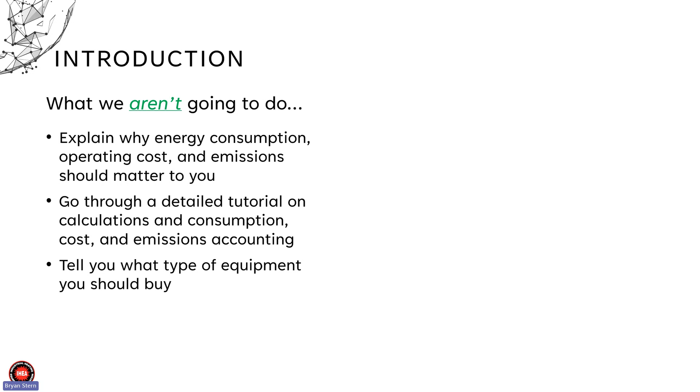And finally, we're not going to be pushing what equipment you should buy here. This is not an agenda-driven discussion. Fortunate enough, working at Gasbarre, we offer both kinds of equipment, and we saw that as a unique opportunity to be able to do a kind of unbiased review and just gain a better understanding of how these different approaches to heat treating do stack up. So we're excited to bring that to you.

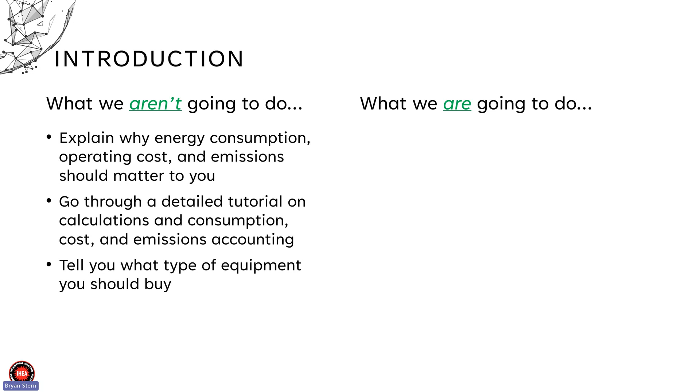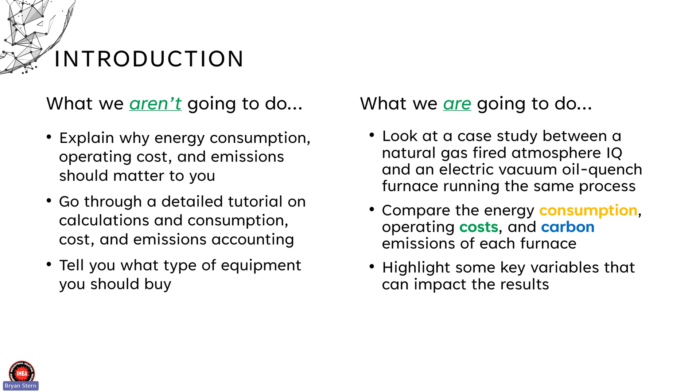We are going to cover a case study comparison between a natural gas-fired atmosphere IQ furnace and an electric vacuum oil quench furnace running the same process. We're trying to stack these furnaces up: if they're doing the same thing, how do they compare across their energy and utility consumption, the cost of operating that equipment, and the equivalent CO2 carbon emissions from running that process. After we go through those results, we'll look at key variables that can change the picture, and then summarize the key takeaways. The objective is to equip you with information to gain familiarity with things to look at when comparing and considering.

One thing outside the scope of this is other reasons you might choose between these two types of equipment. I'm biased, my background is in vacuum, and I think there are a lot of advantages to that approach, but we're not looking at process reasons you might change it. There are other reasons to decide between these technologies, whether environmental, the work environment each piece of equipment creates, safety, process flexibility, or insurability. Those are all important considerations, but we're really focused on the nuts and bolts of how these stack up from a carbon standpoint and a cost standpoint.

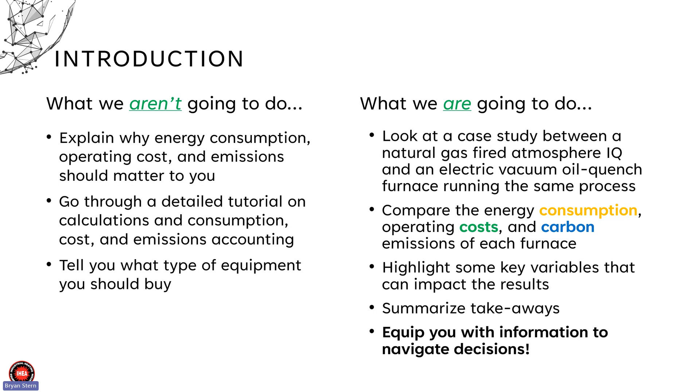To look at that, we're going to go through some background, looking at the pieces of equipment, the furnaces themselves, the workload we're running, and the process we're running it through. We'll do a brief overview of the calculation methodology, then dive into comparing results across those three C categories: consumption, cost, and carbon emissions. We'll look at the key drivers and then go over the takeaways.

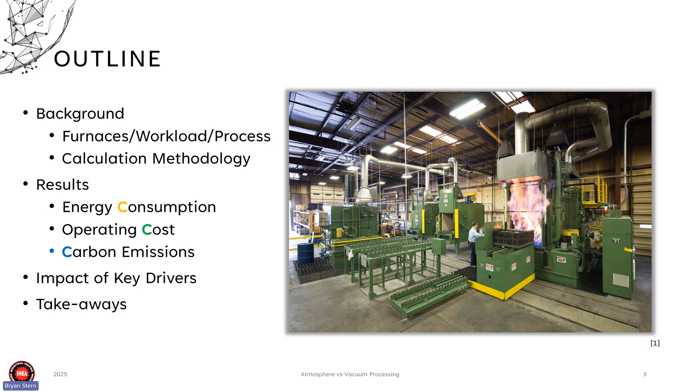Going through the background first, we'll start with the furnaces. We've got the atmosphere IQ furnace on the left here and the vacuum oil quench on the right. Each of these pieces of equipment has the same size work zone, a 36 by 48 work zone size. One of the primary differences is that the atmosphere IQ uses recuperated gas-fired burners for its heat source, where the vacuum furnace uses electric elements fired by transformers with SCR controls.

A couple other notable differences between the pieces of equipment: the IQ furnace has 12 inches of ceramic insulation, where the vacuum furnace only has 2 inches of graphite felt, which is pretty typical for vacuum construction, in an effort to maintain process environment purity as well as keep pump down time to a minimum.

In an effort to maintain that environment, the atmosphere furnace uses endothermic gas. This particular furnace was measured at 750 CFH for its process environment, where the vacuum furnace removes the atmosphere to create that protective environment. So two different methods for creating the process environment, and we'll see that both the insulation difference and the atmosphere difference are some of the key things that impact the outcome here.

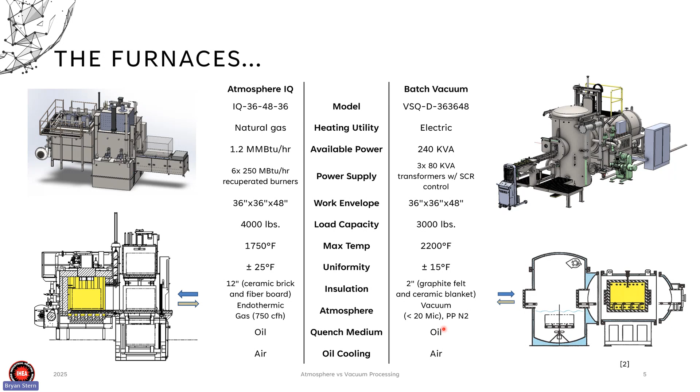There are a few other differences, things like total load capacity, but because we'll be processing the same workload in each, those kind of cancel out. Again, the objective here is an apples to apples comparison of two similar sized pieces of equipment processing the same load.

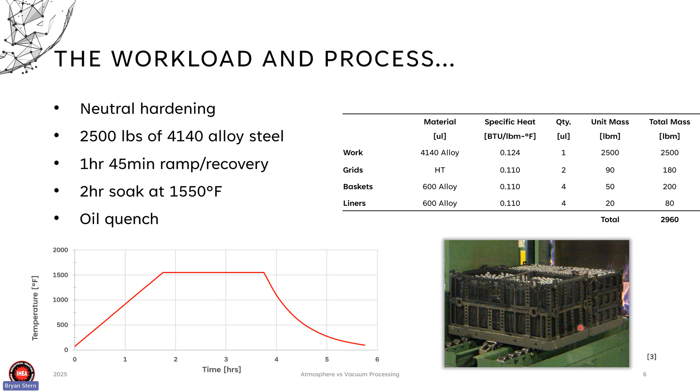Speaking of the workload and process, we'll be looking at a really basic neutral hardening process with 2,500 pounds of 4140 alloy steel, a simple ramp soak profile with about an hour and 45 minutes to ramp, corresponding to about a 15 degree per minute ramp rate, soaking for 2 hours at 1550. Accounting for each of the different components of that workload, the work itself, grids, baskets, and liners, that's a pretty typical picture of what a workload might look like going into this furnace.

We won't get into the details of the calculation, but wanted to do a brief overview. Here we have an information flow diagram outlining the process used here. We're taking information about the workload, fixturing, cycle definition, how long we're holding it, temperatures, etc., and combining that with measured and calculated operating and performance data for the furnace, feeding all of that into a model to come up with energy and utility consumption.

When we have that consumption value, we can combine it with prices for those utilities to come up with operating costs per cycle or on an annual basis. We can combine that same energy and utility consumption with emissions factors to come up with carbon emissions. So you can see that energy consumption will drive and is related to the operating costs and carbon emissions, which we will see.

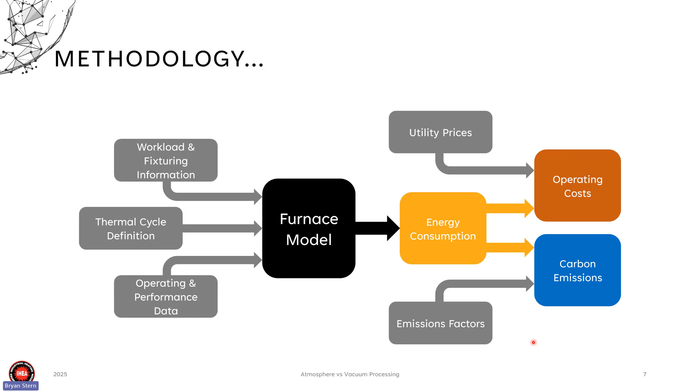I know we might be coming from various backgrounds of exposure to the emissions conversation and things like emission scopes. So I wanted to take a minute to go through some basic terminology and an overview of that. There's a fairly common misconception that if you remove on-site combustion and move to electrification, you eliminate carbon emissions.

That might be true if you're specifically contracting for renewable sources of energy. But in general, for carbon accounting, you're required to account for all sources of emission associated with that process. That includes things like on-site combustion, the CO2 generated there, which falls under scope 1. It also includes emissions associated with any electrical or energy generation used to generate the power used in your process, which falls under scope 2. And it covers any emissions associated with transportation of product, use of product, downstream.

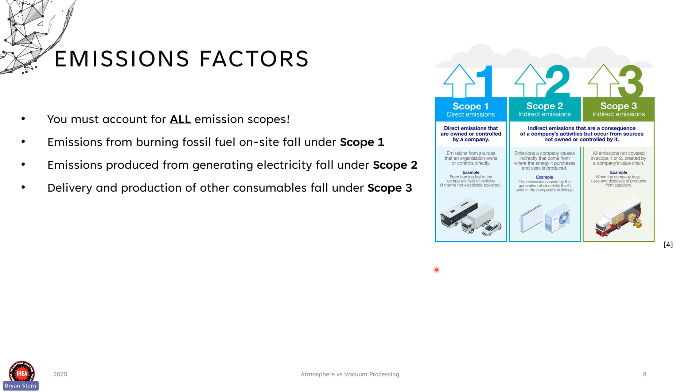In our case, often with thermal processing equipment, we're looking at things like process gas generation, production, delivery, and similar factors. The good news is it's fairly simple to account for the emissions associated with those things, because in most cases, emissions factors allow for direct conversion from amounts of energy consumed to equivalent CO2 emissions. Those emissions factors are publicized and made available at a regional and national level, so you can look up those values published by the EIA and the EPA.

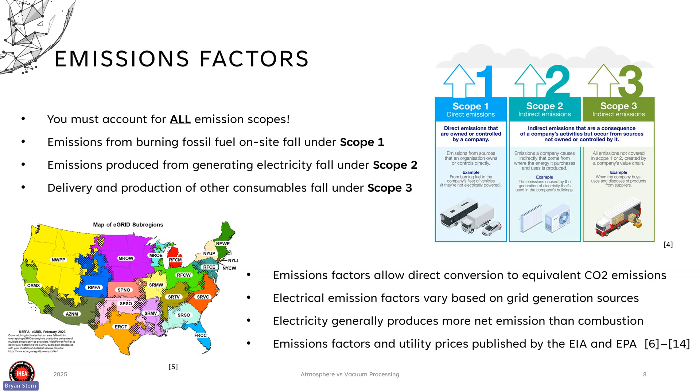A really important thing to note here is that this will show up as we're looking at electrical costs. In general, when we're looking at electrical heating and electrical generation, there are many more processes associated with that than on-site combustion. You're taking some chemical fuel source and converting that into thermal energy, then mechanical energy, using that in generators to generate electricity, then transmitting that electricity, bringing it back, and converting it back into thermal energy. Whereas for on-site combustion heating, you're going directly from chemical to thermal, only dealing with the efficiency of conversion for that one process, so it tends to be very efficient.

Just to illustrate that, in this case study we're using recuperative burners for that process at about 1550. If you look at the efficiency associated with that burner, we're looking at something a little over 75% efficiency. If you look at typical efficiencies for electrical generation associated with different types of power plants, you can see pretty quickly that typical efficiencies in a burner are more efficient than your most efficient power plant. So unless you're using renewables, it's not necessarily a better option even for emissions.

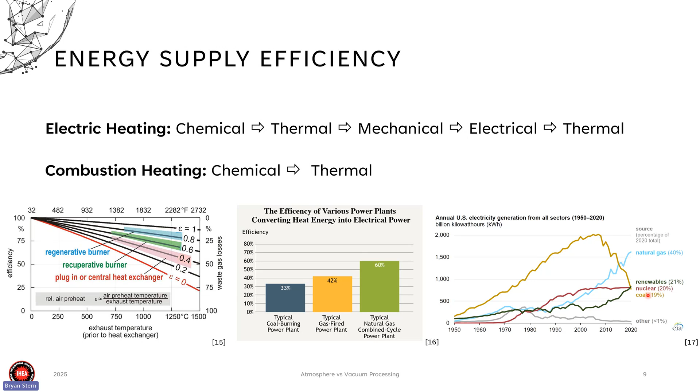That being said, looking at this plot on the right, you can see that renewables are growing significantly in their contribution to the grid, a trend that is expected to continue. The more renewables that are contributing to the overall power generation in a given area, the better the electrical prospect is going to be.

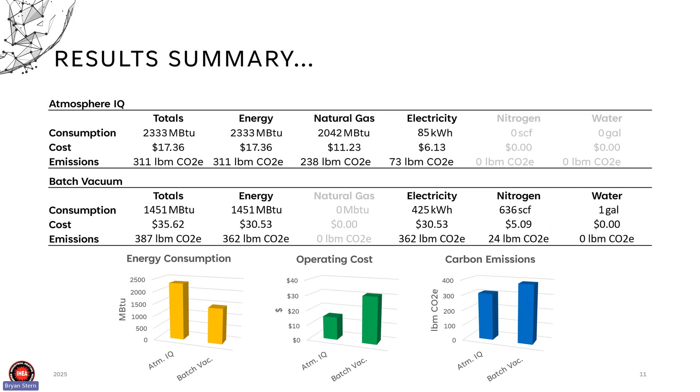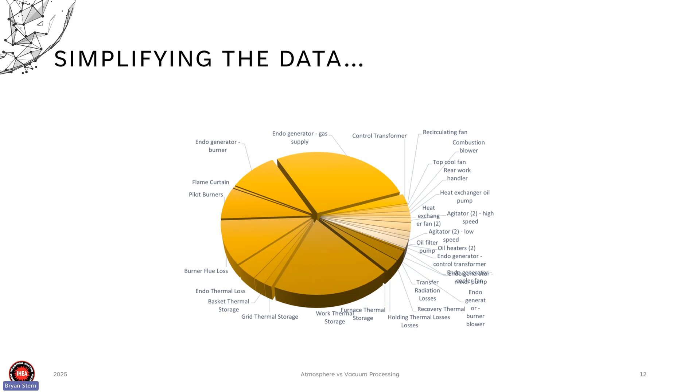I put this slide together to illustrate how many different things are coming into play in this model. You can see there's a lot going on, a lot of pie slices here, it's really busy. So in an effort to simplify that, we combined some of the categories. You can see things like work thermal storage from the grid and furnace thermal storage all combined into thermal storage losses. Similar things are done with steady state holding losses through insulation, etc., just to collect those categories and simplify the information we're looking at. This particular pie chart is for the atmosphere IQ energy consumption, but we applied a similar process to all three categories for both furnaces.

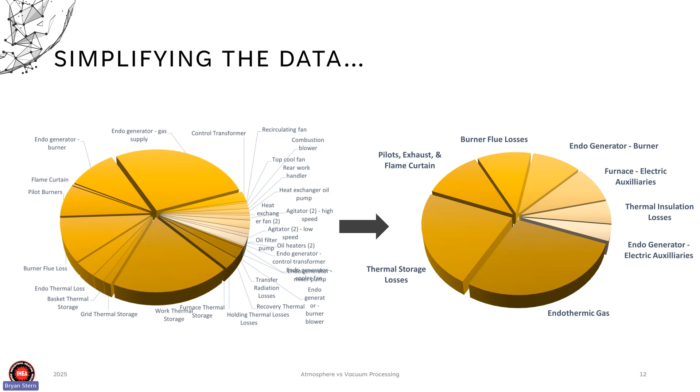Starting off with energy, we've seen the overall result here, but diving into some of the pieces that make that up, the first thing we can notice is that the thermal storage losses are a similar value for each furnace. They show up as different percentages because they're a different portion of different totals, but essentially the storage losses for each furnace are equivalent because we're running the same workload, heating up the same mass and material to the same temperature and cooling it down.

So while that's equal, we're still looking for where this difference is primarily being driven from. If you're like me, one of the first things you think of when it comes to furnace equipment energy consumption is the insulation losses for actually holding the equipment at temperature. We can see here that the atmosphere IQ has about a 5% contribution from insulation losses, whereas the vacuum furnace is 30% - a much, much higher insulation loss. That goes back to the difference in insulation construction we noted earlier, and some of the advantages of having higher insulation.

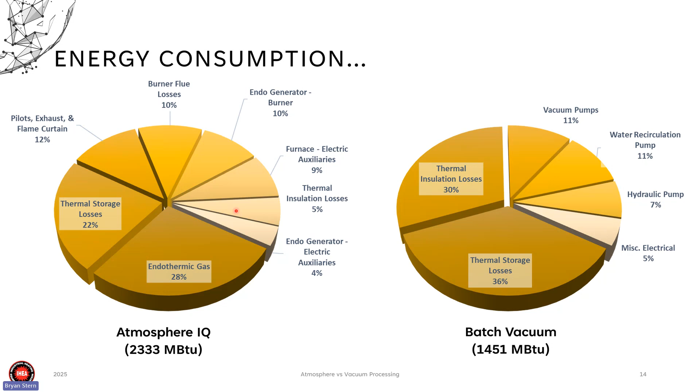That can be pretty clearly seen as we're seeing these electric auxiliaries, which here made up 9% - that pie slice just inflates right up to 20%.

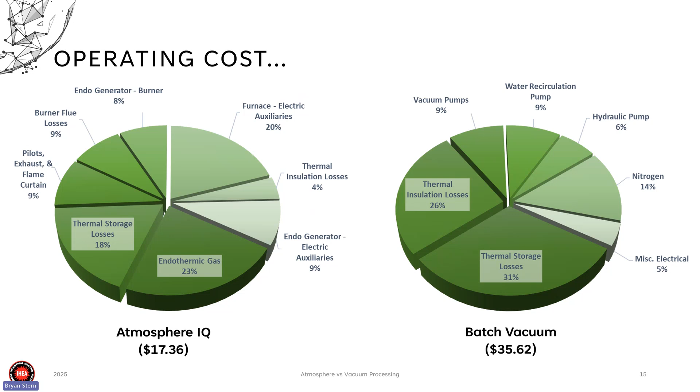So that's the main difference that we're going to see in both the cost and emissions, with the batch vacuum being more expensive to operate, but the breakdown of contribution for those reasons being essentially the same, with electrical sources being exaggerated a little bit more.

So similar breakdown here, with the primary components being the thermal storage losses in the batch vacuum—the amount of energy used to heat and cool the furnace and the workload—with the endothermic gas being the primary contributor for the atmosphere IQ. And we're still seeing that slight increase in the overall value for the batch vacuum, but the emissions are very close, or much closer than the other categories.

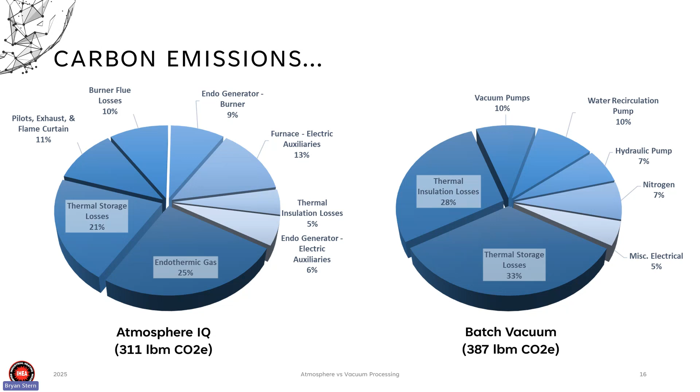So we'll jump into talking about some of the variables that are driving those results.

So there's a lot of things that can change the model, and what we're really interested in is what things change the model the most. With this model at our disposal, we were able to do a sensitivity analysis to look at what things have the greatest impact on the results, and consequently really deserve our attention as we're looking at equipment and speccing equipment for a particular process.

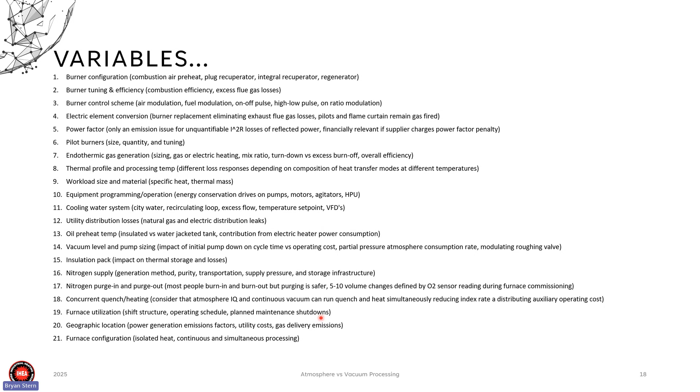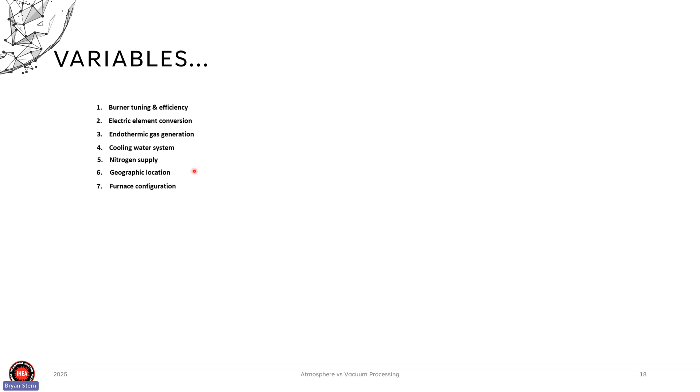And several of those variables really rose to the surface. So we have 7 listed here, and we'll have an opportunity to go through just about every one of those: burner tuning and efficiency, electrical element conversion, the endothermic gas generation associated with the IQ, cooling water sourcing, nitrogen infrastructure setup and supply, geographic location, and the furnace configuration.

So jumping right into burner tuning and efficiency—this is one that's very often talked about, and it applies just to the IQ. I mentioned earlier that we're looking at recuperated style burners in that furnace, so we're looking at 75% efficiency for that. But that efficiency is dependent on your actual burner configuration and design, and additionally it's impacted by things like your control scheme, your turn down ratios, how efficient that burner is at operating in a turn down state, as well as your air to fuel ratio and how close you're able to operate that burner to ideal conditions.

So if we were to change that, instead of operating at 75% efficiency, which is where that burner should be—very often we'll see in installations things like burners not tuned properly or missized and operating at a poor turn down condition—and if we were to change that efficiency to 50%, which I'd say is pretty modest for the kinds of values you end up seeing in the field a lot of times, that's going to increase the overall energy consumption of this process by 21%. And that's leading to a 16% increase in operating cost and an 18% increase in carbon emissions. So a simple thing like burner tuning can have a dramatically detrimental impact across all three of these categories. It's really important to pay attention to the tuning on your burners.

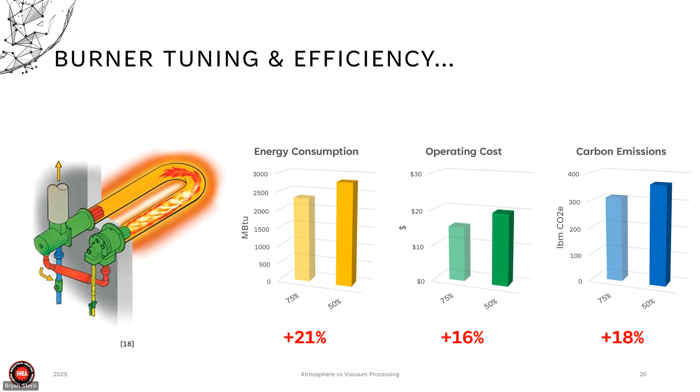Next up, we have the electrical element conversion. This tweak is looking at what if you were to take that IQ furnace and convert it to use electrical elements instead of burners. This is, I think, a pretty popular target because electrification is just generally understood to be a positive thing from an emissions and operating cost standpoint.

And when you're turning it into just thermal energy and heat, it can be more efficient to just do that on site, with renewables being the exception, and that growth of renewables being something we have to keep in mind. But this is just to illustrate that if you were to, without any other information, go in and do a conversion with the objective of reducing emissions, that may actually be counterproductive to what you're trying to do.

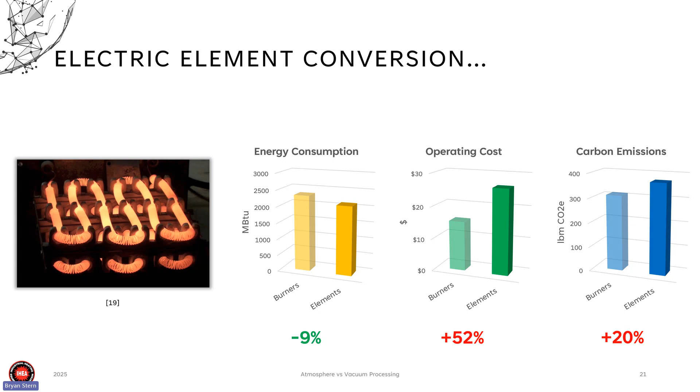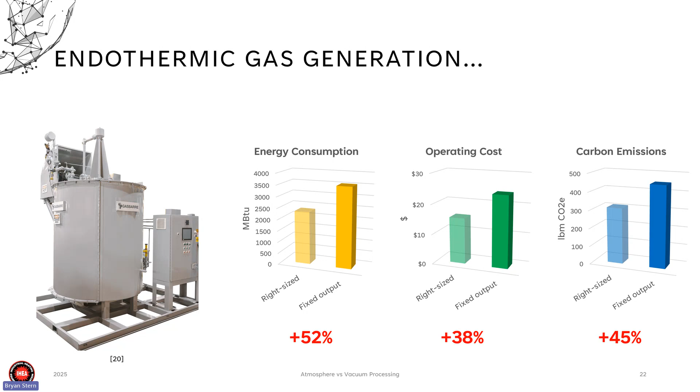And just to point out again, these are not increases of just the endothermic portions. These are increases across the entire cycle cost. So with that one pie slice, the change to this variable is having enough impact to change by these percentages. So another really significant thing to pay attention to is how you're generating your gas, what you're doing with it if there's excess, and what your turn-down scheme is for that equipment.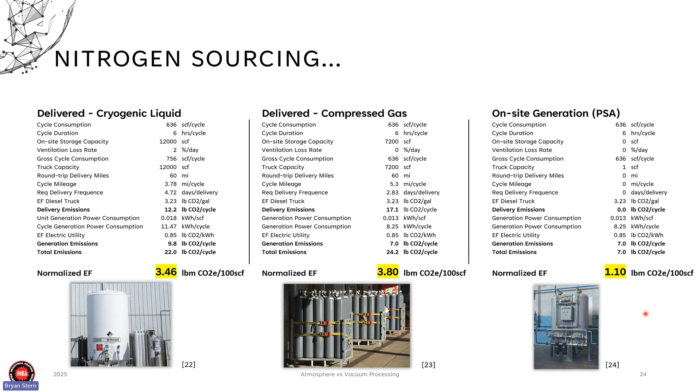And that brings us to location, which impacts some of those variables. This is one that might have been on your mind as we were going through this. All the numbers we've talked about so far use US average rates, so across the US average, what are the emissions factors for utility generation? But that doesn't account for the fact that this is location specific.

So to illustrate that, we'll take this case study using US average numbers and bounce it around to several different states to see how that impacts the operating cost, the relative operating cost between the two pieces of equipment, and the relative carbon emissions. Keep in mind the energy consumption isn't going to change. The amount of energy required to heat that workload in the furnace and run that process is the same no matter where we're located. But what changes is what that costs to do, and based on the local contributions to the electrical grid, what that means for the relative carbon emissions.

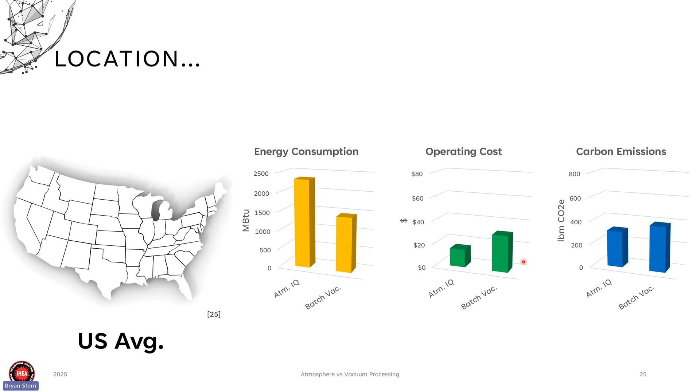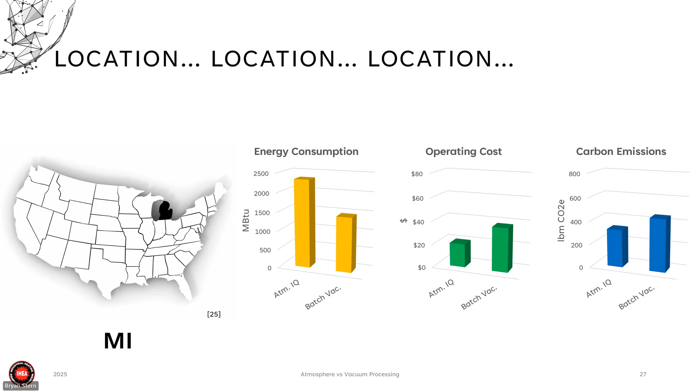So pay special attention as I click through these following states to the way the relative changes happen between the green bars and blue bars. We'll jump through from US average to West Virginia, Michigan, Texas, California, Delaware, Oklahoma, and Vermont. You can see that just by virtue of where it's located, the picture can change completely. It can be flipped on its head, where in a different location, the vacuum option has significantly lower emissions as a solution, as a consequence of just the electrical generation makeup in that area.

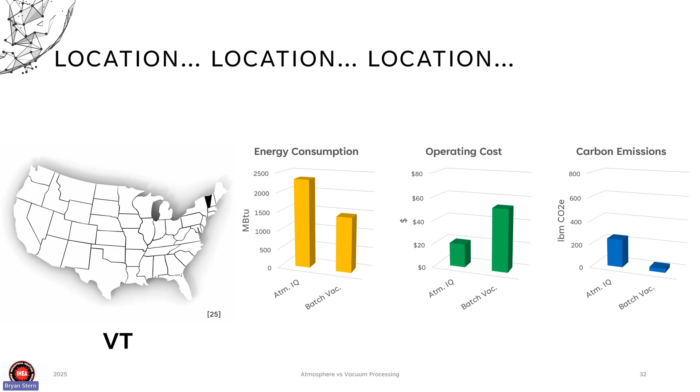So location is something that means we can't just generalize the answer to this question. You can't say this technology is in all situations better than the other. It really depends on your context, and that's something that has to be considered and looked at as you're making decisions around these types of equipment.

And the final thing we'll look at here is just the actual equipment configuration. I think this is something that's very often overlooked, so often overlooked that I overlooked it in the course of putting together this presentation, because we're looking to make an apples to apples comparison, and the two pieces of equipment we're comparing in the case study are this Atmosphere IQ and this batch vacuum.

But the Atmosphere IQ has the capability of loading a new load under the quenching load, which essentially creates a continuous flow that's just loaded and unloaded out the same side of the furnace. That boosts the index rate and utilization for the furnace compared to the batch vacuum, where you have the additional pump down time. Without that loading over oil capability, our index rate is actually increased, so we're not getting loads out as quickly, and our utilization is lower.

It's not a great comparison compared to if we were to take that same piece of equipment and turn it into a continuous configuration, which is essentially the same equipment, but the work flows through it. Very little capital cost, it's just adding an extra door, and you have to have the space in your facility to handle unloading on the opposite end of the furnace.

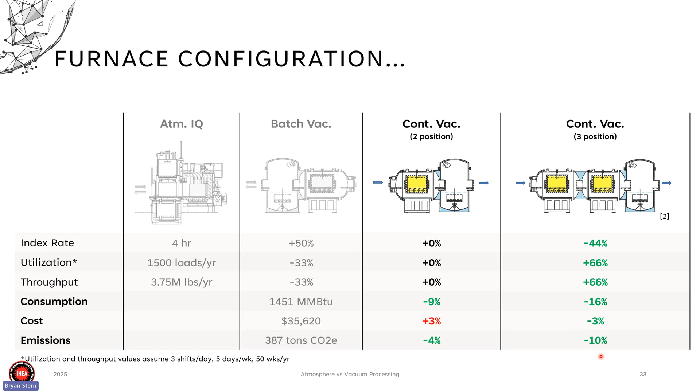So that was a fire hose of information, and just to try to button it up here at the end, we'll go through some of those takeaways. A big takeaway is that gas-fired atmosphere furnaces will typically consume more energy.

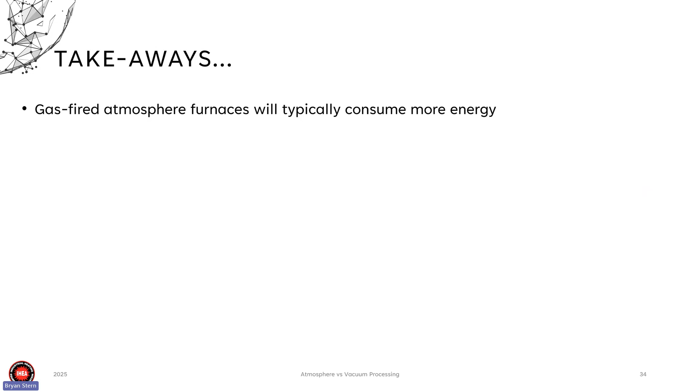That's intrinsically because of both the atmosphere that they're using to operate, as well as the fact that burners have losses that electrical heating doesn't, where you just have a totally enclosed process without flue losses or concern for tuning the gas, so you're not throwing energy away in that way.

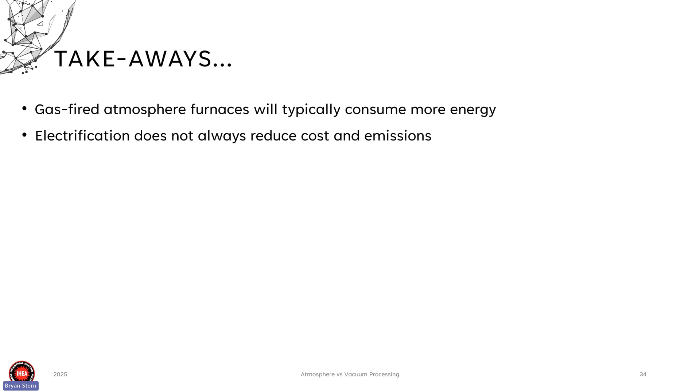That being said, electrification does not always reduce cost and emissions. And that's important—it certainly does at times. It has a lot to do with your energy sourcing, things we've talked about, like location, but it's not a safe generalization to say that moving my combustion-fired process to electrification is going to be beneficial from a cost or emission standpoint. You have to look more at the specific context to make that call.

Growth in the renewable energy sector is a trend that will continue, and the more contribution there is from that sector, the better those emissions factors get, the more it pushes for electrification. And that will happen at different rates in various regions, depending on the infrastructure that's put in place.

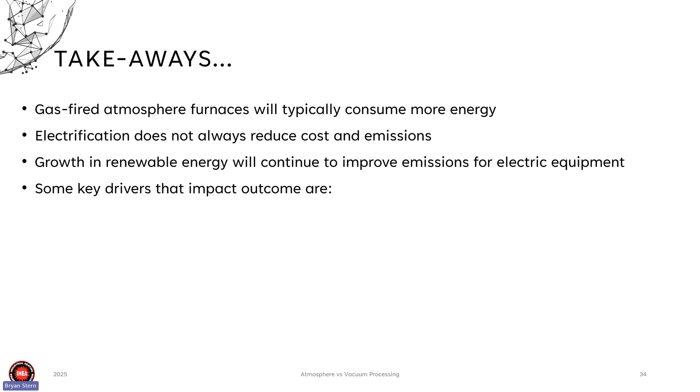Some of the key drivers that impact the outcomes are the equipment design and operation—what we're doing with it, how long we're holding, what temperatures we're running at, what we're putting through it. All of those things make a difference, as well as the utility infrastructure, things like how far we are from suppliers delivering gases, those transportation costs.

And finally, location is just huge. These decisions cannot be considered in a vacuum, no pun intended, but they have to be made with an awareness of the context of location. You can't divorce it from that.

And then finally, multi-chamber continuous furnace configurations offer benefits that can flip these results on their head. If you change the way a piece of equipment operates, it can lead to a totally different picture, and there's a lot of advantages that can come from doing that. So it's something I think a lot of manufacturers and suppliers are looking at increasingly to take advantage of some of those configuration benefits.

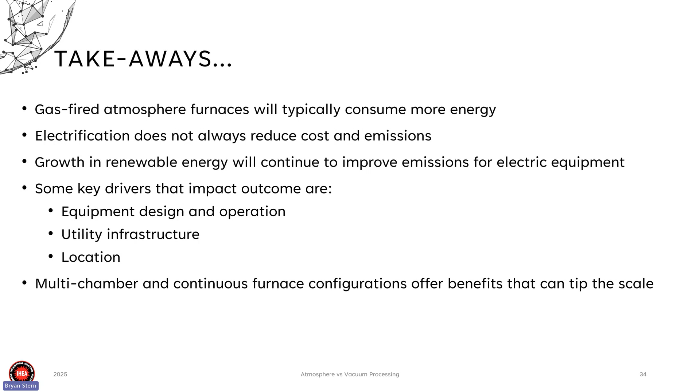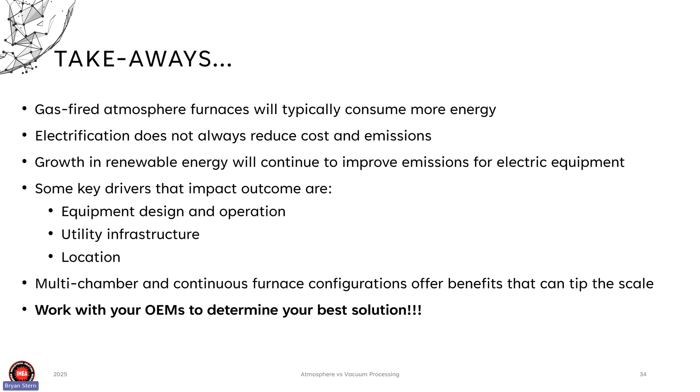Finally, work with your OEMs to determine your best solution. There's a lot to consider here, and speaking from the OEM side, it's certainly helpful to have early partnership over making decisions on which direction to go, so you can get access to things like utility consumption for the different styles of equipment you're looking at, and marry that together with your particular utility costs and emissions factors in your area, looking at your specific context. Two parties have two different pieces of information required to make that whole picture. So definitely talk with your OEMs early to dive into that equipment.

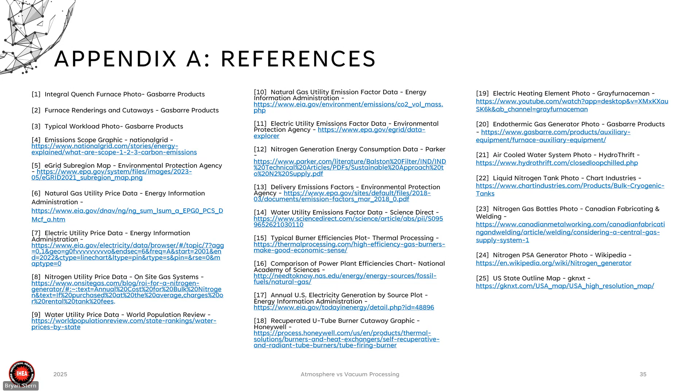Got a page with just some of the appendix resources used here. So if you're interested, there's links for where published emissions factors can be found. And that's all I have. So if we have any questions, I'll turn it over to you, Kelly.

Thanks so much, Bryan. That's a lot of great information. So we do have a question here. You were talking a lot about location. What led you to pick the states you did for the comparison, and how often or where are the results different? Yeah, that's a question I've gotten before because some of the states are not what we would say are heat treat hubs across the country.

Vermont is not known for its robust heat treat industry. Those states were chosen really because they represented the most dramatic shifts. So if some more obvious states were not included, it's likely because they were pretty close to the US average and there wasn't any dramatic shift in those graphs. The states that were in there were really selected because they represented the most extreme juxtapositions of the relative emissions from electricity versus gas and the relative cost between electricity and gas. So trying to look at the most dramatic swings we could have, and anything else that wasn't included falls somewhere in between.